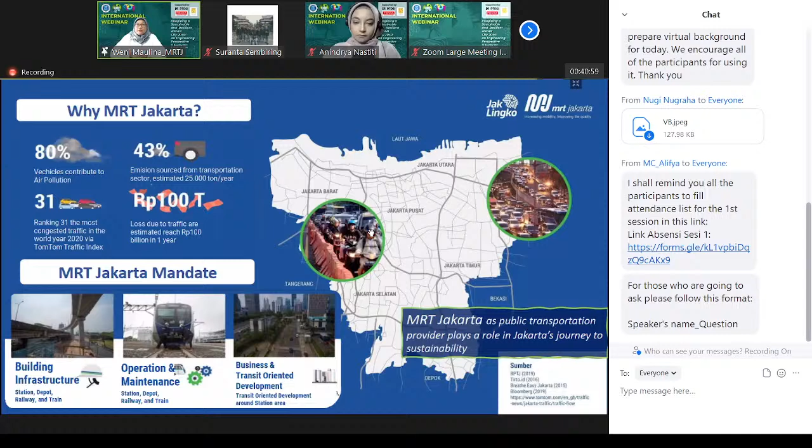Currently we are building MRT Jakarta Phase 1 and Phase 2 lines. For Phase 1, from Lebak Bulus to Bundaran HI, from the southern part of Jakarta to the central part, we have built and operate this, including 13 stations, of which 7 stations are elevated and 6 stations are underground.

We are also currently constructing the MRT line for Phase 2A, which consists of 6 underground stations across about 5.8 or 6 kilometers. In the future we will also construct the Phase 2B area, which goes along the north to the depot area in Ancol Barat, consisting of another 6 kilometers.

Currently it's under the feasibility study, and we are going to start the basic engineering design soon. All of these constructions are funded by JICA ODA loan.

As I introduced before, the MRT Jakarta journey actually started a long time ago, since 1989, which we had the first study of the Jakarta mass transit system. In the year 2000, we conducted the feasibility study of MRT Jakarta by JICA. This was also funded by JICA and conducted together with the Ministry of Transport and the provincial government of DKI Jakarta. And in the year 2008, there was the establishment of PT MRT Jakarta itself.

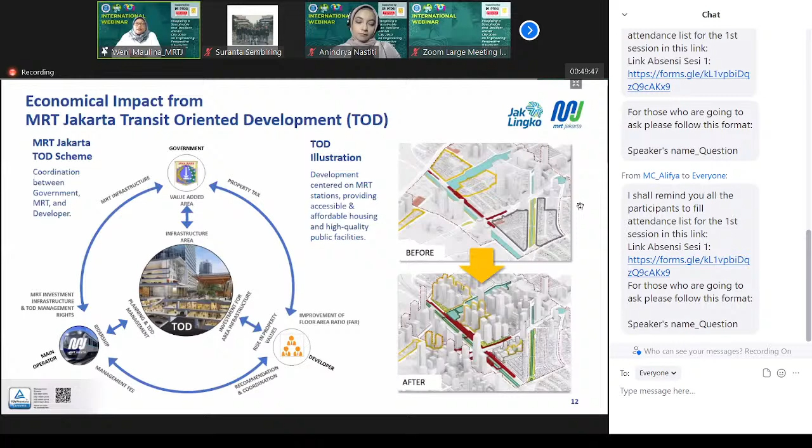In the next slide, we can explain the potential of MRT Jakarta based on the TOD itself. We have the potential multiplier effect: about 242.2 trillion rupiah growth in property values in the MRT Jakarta area along the line.

We also have the potential of 639,000 employment opportunities, about 34,000 units of potential affordable housing development in the TOD area, 149.1 kilometers of pedestrian path to be built, about 73.9 hectares of identified public open space, and about 56,800 square meters of active riverside.

So when we construct and operate the MRT Jakarta, it is not only solely on the transit or transport mode itself, but also on the areas nearby that we're going to develop.

The potential contribution to MRT development: first, it's the biggest contributor to MRT's non-fare box revenue, and also a source of funding for future MRT development. It also improves pedestrian access and comfort around stations, and provides adequate integration with other public transport modes.

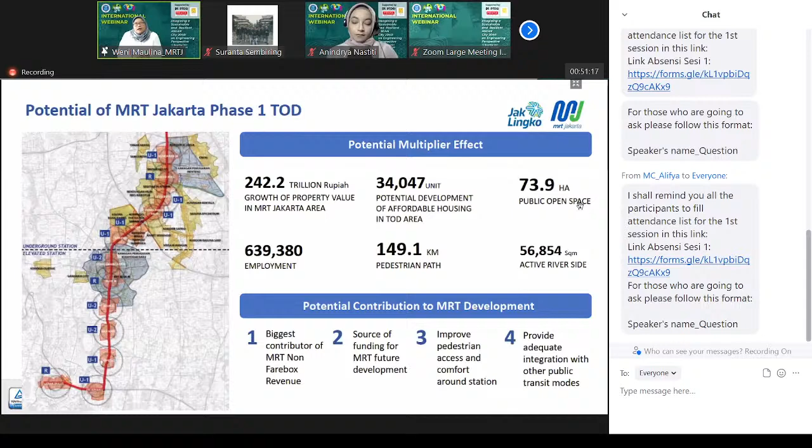One of the highlights we are making with the MRT underground stations is providing connections to surrounding areas, so investment and development of interconnections around stations will become an advantage for the surrounding areas and trigger regional revitalization as well as economic growth.

I think this is the main issue that we are going to discuss today: how MRT Jakarta can give better accessibility to the surrounding areas.

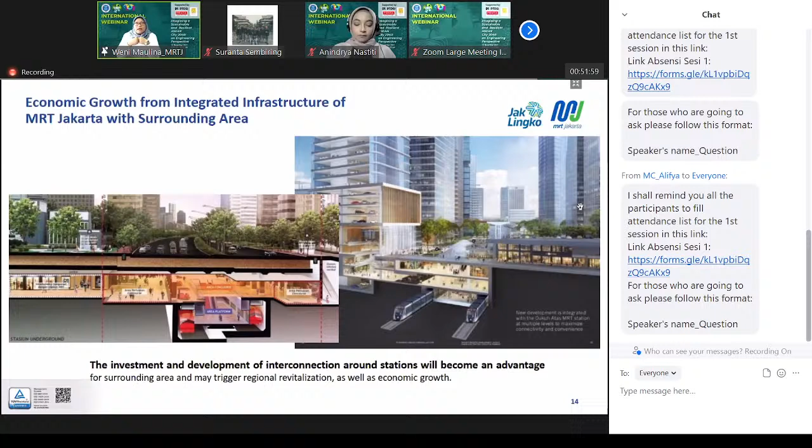As part of sustainable public transport, other than providing the transport mode itself, we are also building a new culture. This has been done since 2019, where we have always made public socializations about how to use the trains, how to get down from the trains, and so on. It kind of changed the habits and cultures of the people of Jakarta.

We also provide better opportunities, like public spaces, green spaces, pedestrian and bicycle infrastructure. Some habits that have changed: first, trying to shift people to use public transport modes. They are using not only MRT, but they can also use their own bicycles to go to work or from their homes to their destinations.

MRT Jakarta facilities can provide bicycle racks, and we also provide bike areas in the trains. They can even use folding bicycles very easily, using them while still being able to use the trains.

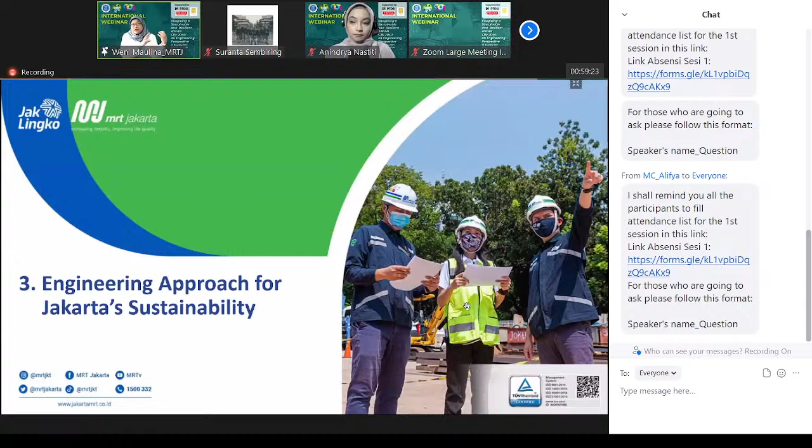Last, we also collaborate and support the mitigation of COVID-19 impacts with the provincial government of DKI Jakarta, including initiatives such as mass COVID-19 vaccination programs. So that is what I would like to highlight on MRT Jakarta's initiatives and how MRT Jakarta can support the sustainability of cities.

Next, I would like to explain the engineering approach to building resilient infrastructure. One of the challenges is how we came back after the pandemic situation, after experiencing a very significant drop in ridership and operational challenges. But in recent times, ridership is now increasing.

First of all, here's how we responded. What we did in 2020 was respond to COVID-19 itself, and starting from mid-2020 until the end of 2020, and also the beginning of 2021, we rebuilt the trust of passengers to come back and use the MRT. Currently, we are also seeing ridership increase nowadays.

We provide socialization and manage how people can use the trains without doubt, due to the COVID-19 health situation. One initiative is that we instruct passengers not to talk to each other to minimize COVID-19 spread and airborne transmission. We also provide stickers for them to sit and stand in designated areas of the trains, to try to maintain social distancing. That is one of the initiatives we have made.

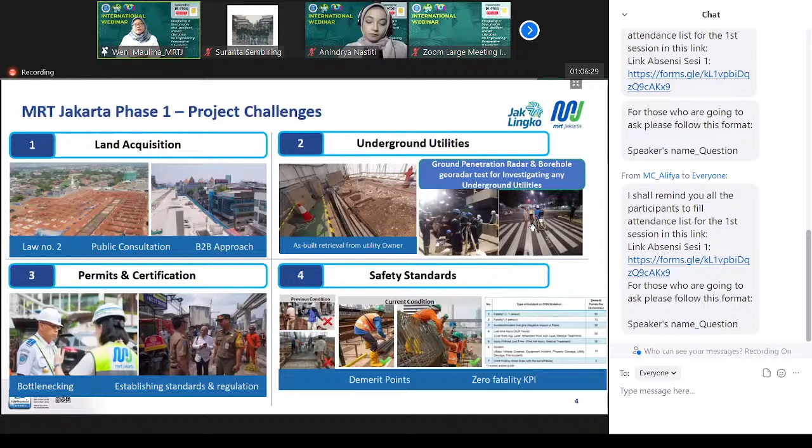Next, another challenge in phase 2, more on the engineering and technical side: going to the north, MRT will face soft soil conditions. So we have to conduct soil improvements; strengthening and monitoring measures are required. Also land subsidence and flood threats require improvements in the design, better monitoring and standard operating procedures, and also innovative solutions that we have to look for.

Also going to the north, we are facing construction in a very narrow corridor, whereby on the left or right there will be buildings, and in the middle there will be canals. We are also facing old buildings or heritage buildings in close proximity. So we are improving the design by having some traffic deckings, and also having a very comprehensive traffic diversion plan, so that we can close lanes or roads at certain times and construct more appropriately.

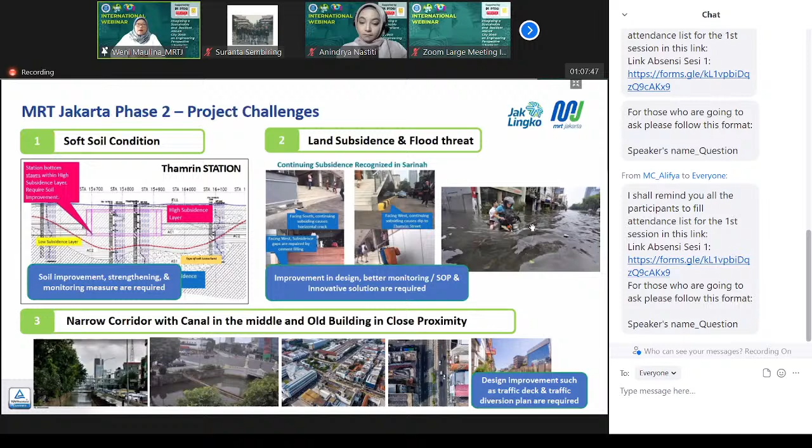Next, another unique thing for the phase 2 area is that we are coming to the heritage side, and we are facing a lot of heritage buildings. Since the basic engineering design of phase 2, we have been conducting archaeological studies and archaeological test pits. In fact, now when construction has been carried out on site with the contractors, we have found several findings, which we call ODCB, objects of suspected cultural heritage. So based on law number 11/2010, we have to follow some procedures to maintain and to make the findings safe.

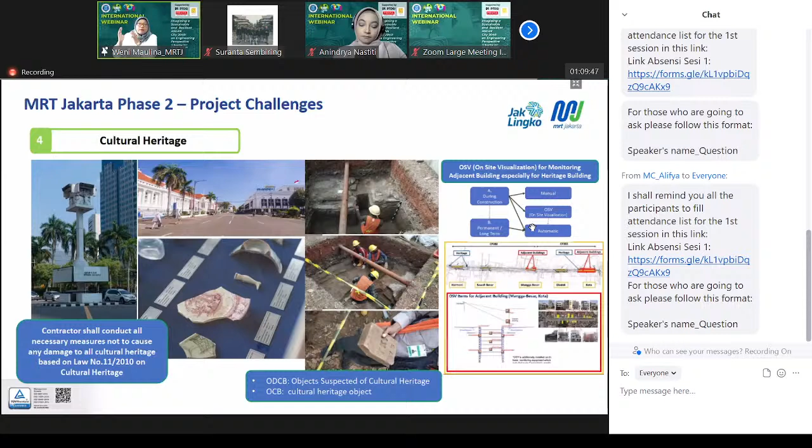Another thing is we provide OSV, on-site visualizations. This is a kind of monitoring when we do construction on site, when we excavate deep excavations, we install this OSV monitoring device, so that when there is some inclining, we can have alert and alarm levels, not only by numbers but also by lights, so these lights can alarm the workers on site when it turns yellow or red, meaning the workers on site need to get away from the excavation area to be safe, because there is an alarm level of inclining slopes or some problem in the excavations. So this is what we are going to apply in the phase 2 area.

Now, coming to the design itself, for the infrastructure, how is MRT being built as a resilient infrastructure? I would like to highlight the main points, especially on the flood area, a flood protection system. As you may have heard, Jakarta is a flooded city.

But we have provided a flood protection system, with some levels of protection in the MRT. First is to provide additional entry steps, with a minimum height referring to the 200 year flood return period. Second, we are installing the floodgate. And the third measure, we install a sump pit inside the stations. If everything goes wrong and water comes into the stations, it will be collected in the sump pit.

Next is the earthquake design, where MRT Jakarta has two levels of earthquake design. We design for an ODE, Operational Design Earthquake, and also MDE, Maximum Design Earthquake. What does ODE mean? It means that when Jakarta is having a more or less middle scale earthquake, this ODE requirement or scenario will be implemented. The structure needs to be safe and protected without any significant structural problems. We also design for a Maximum Design Earthquake for the 2,500 year return period for stations and above ground structures.

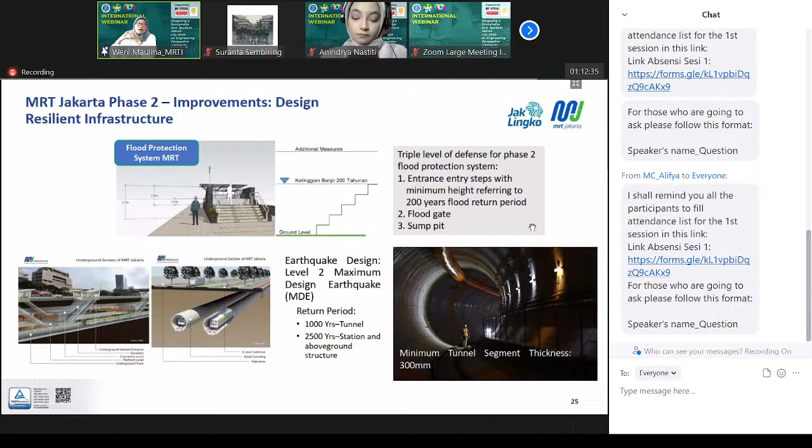By having this maximum design earthquake, we intend that the structure may have some structural issues, but it should be repaired as soon as possible. So we are looking for the immediate occupancy level of the structure. With this, we have a minimum tunnel lining thickness of 300 millimeters.

The other aspect is that by having MRT Jakarta, we have this resilient structure as part of the sustainability development goals. Another thing is we have cultural and heritage educational spaces that we intend to have in MRT Jakarta.

For example, we have the Monas station, so MRT Jakarta will collaborate with the authority and stakeholders such as Museum Nasional and Galeri Nasional to provide curatorial work for Monas Station artwork and gallery. We intend this for a cultural education purpose, especially in the Monas area.

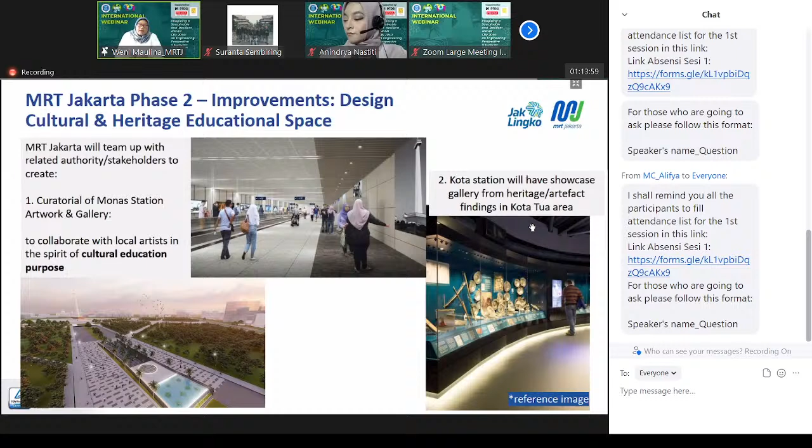And also in Kota Station, we will provide a showcase gallery for heritage or artifact findings in the Kota Tua area specifically, or perhaps in other Phase 2 lines, which we collect and put in the Kota station. This is also a collaboration with the authorities, with Dinas Kebudayaan and the Cagar Budaya team.

The other thing is that we have advanced railway technology. For the rolling stock itself, we are using LED lamps for lighting, and we are using electricity in the form of overhead catenary as the power source. We are not using gas, fuel, or diesel.

We also provide a regenerative braking concept in the trains, where the remaining energy that comes to the trains can be stored. We're using VVVF inverters for propulsion to improve energy efficiency, and for materials, we're using stainless steel for the car body.

Also, in terms of railway technology, we are applying communication-based train control technology for signaling, which gives a more reliable and safer environment for the train signaling system.

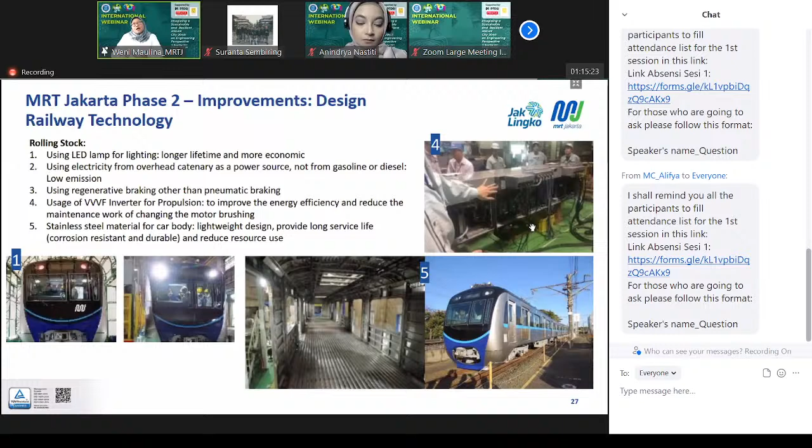Next is the integrated infrastructure. When designing, our approach is first to make a compacted design of stations with better circulation. What we have to underline most is how passengers can be convenient when they go to the underground or MRT stations, and the level of service in congested areas of the stations.

So the first concept is that in our design, we are considering the fast movement of passengers, and also considering personal space for passengers when waiting or circulating in the stations.

Next is direct connection with adjacent buildings. As I mentioned before, this is one of the benefits of having the mass rapid transit metro system: underground stations whereby we can have direct connections to properties nearby.

This is one of the key issues of the transit systems when we go underground. Another thing we need to think about in the design approach is accessibility, underlining universal design for disabled persons, pregnant women, and the elderly. This is the most important feature in the design of stations and tunnels.

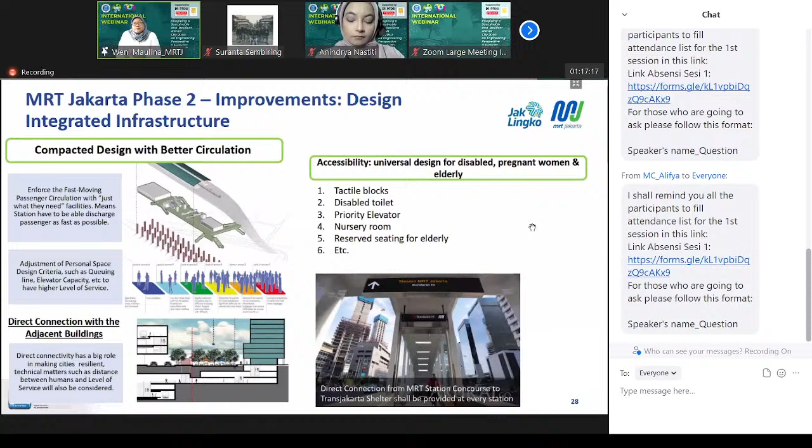We have also applied digital transformation in the construction and operation of MRT Jakarta. Especially on the construction side, we implemented Building Information Modeling with a maturity of level 2, which is also a lesson learned from the phase 1 project.

The main important thing is that we do everything by digitalizing, which gives us the benefit of easy coordination with several contractors - we have 8 contractors actually - as well as with consultants, and provides clash detection so we can identify any clash at the beginning of the project, rather than looking at manual papers and identifying clashes at a later stage. So we have applied Building Information Modeling as part of our construction works.

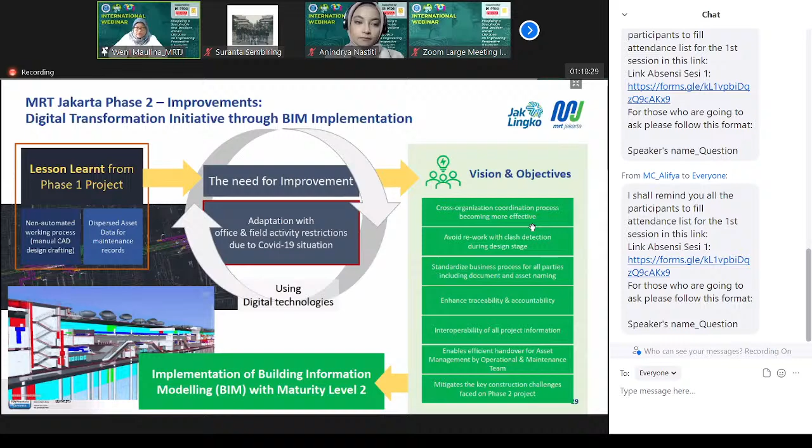So what is next for MRT Jakarta? One of the initiatives we are looking at right now is a program called Birukan Atap, Birukan Langit, which aims to revolutionize the MRT Jakarta energy system through integration of renewable energy infrastructure. Currently, even though we use electricity, our source is from PLN, and now we are looking for another source, perhaps a new or renewable energy type of source.

The aim of the program is to enable 100% clean electricity for MRT operations. The three innovative renewable energy schemes being implemented are solar rooftop schemes, renewable energy certificates, and later, renewable energy power itself.

This is my last slide, on the future network expansion for MRT Jakarta. DKI Jakarta has initiatives for railway networks by the year 2039 totaling around 215 kilometers, including about 381 kilometers from the central government. Some of this is the MRT Jakarta rail network, totaling about 80 kilometers.

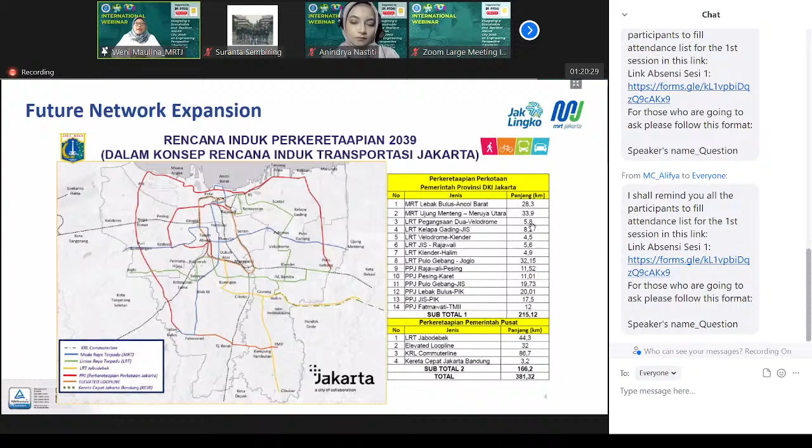In conclusion, MRT Jakarta has the vision of increasing mobility and improving quality of life. I hope you have seen from my presentation what the vision of MRT Jakarta is. As public transportation, MRT Jakarta plays an important role in establishing a sustainable city for Jakarta through its design and engineering approach - first as a safe, reliable, environmentally friendly mode of transport, building new cultures for the people, and stimulating economic growth nationally and even regionally across ASEAN.

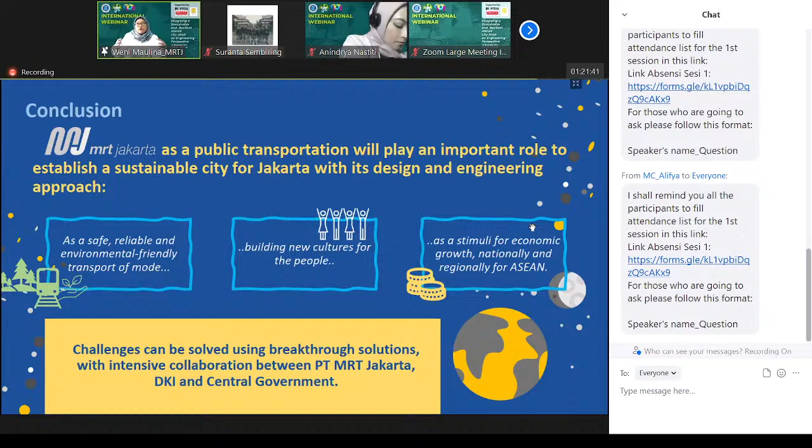Challenges can be solved using breakthrough solutions through intensive collaboration between MRT Jakarta, DKI, and the central government. As Ibu Reni also mentioned in her keynote speech, policy and strategy are very important for how we can develop sustainability in cities.